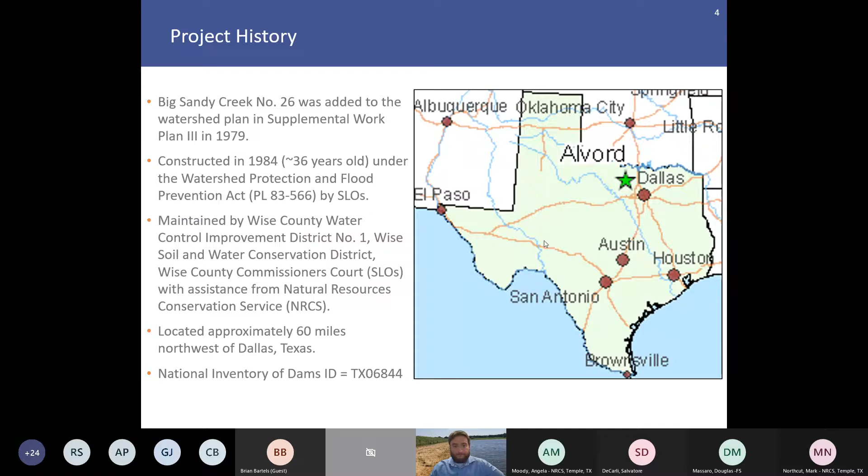Some of the key information regarding the dam: it's about 34 foot tall, has a drainage area around 435 acres, and it's currently classified as high hazard. So this is a case, just like Mark alluded to in the introduction, where the structure was originally designed as a low hazard structure, and due to additional analyses — dam breach, inundation, and hazards downstream — it has since been reclassified as high hazard, and therefore does not meet the requirements for high hazard dams.

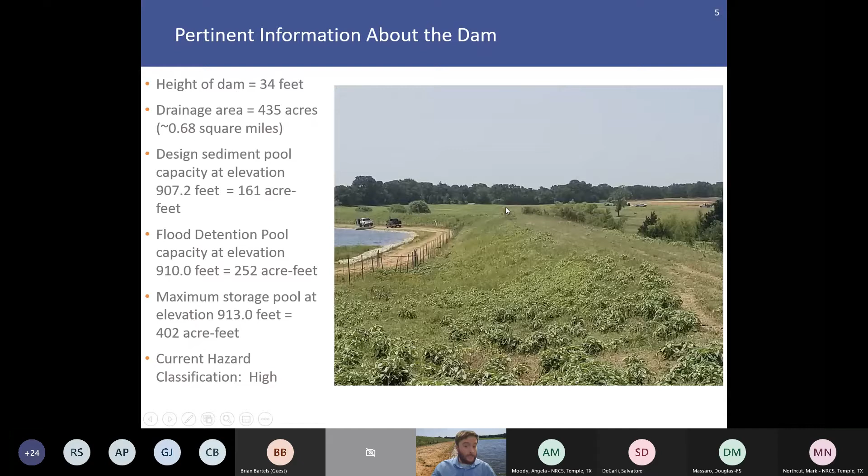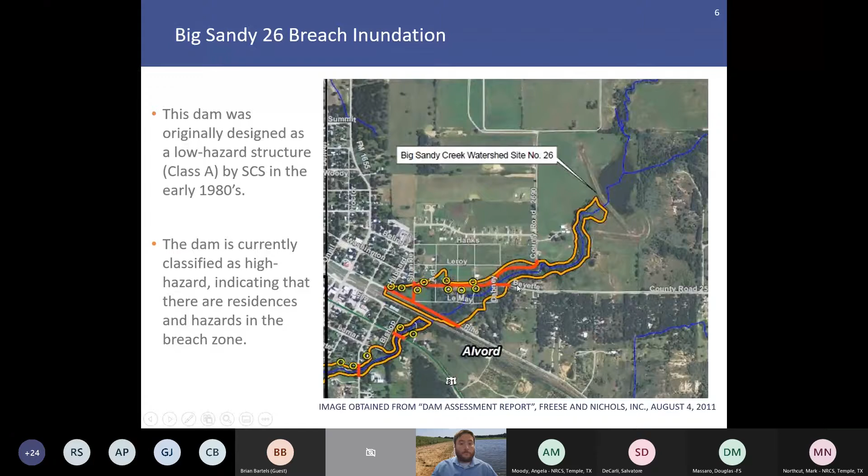This is a look at an excerpt from Freese and Nichols' Dam Breach Inundation Analysis Report, and you can see the limits of the theoretical breach downstream, the structure, and the reservoir up here. These limits represent where the theoretical breach would inundate. Based on the number of hazards and expected loss of life downstream impacted by a potential failure, that's how the high hazard classification is determined.

Looking at a brief timeline: as we mentioned, site number 26 was added to the Supplemental Watershed Plan in the late 1970s, and the dam and spillway were constructed in 1984. Fast forwarding a little bit, Freese and Nichols performed a dam assessment report and dam breach inundation analysis report in 2011, which again confirmed the high hazard classification. At that time, some initial alternatives analyses were performed, and the recommendation for submitting this project into the National Watershed Rehabilitation Program was also made.

And here we are in 2020. The project was accepted as a candidate to be funded partially by the federal government. As part of that, this is where this supplemental watershed planning study commences, and it's one of the prerequisites to acquiring that funding assistance and technical assistance provided by NRCS. As part of that planning study, it brings us to today, which is this meeting where we present the project. It's very much a kickoff in a sense, where we show you what we're planning to do and ask for feedback and, as I said, other known concerns about the project.

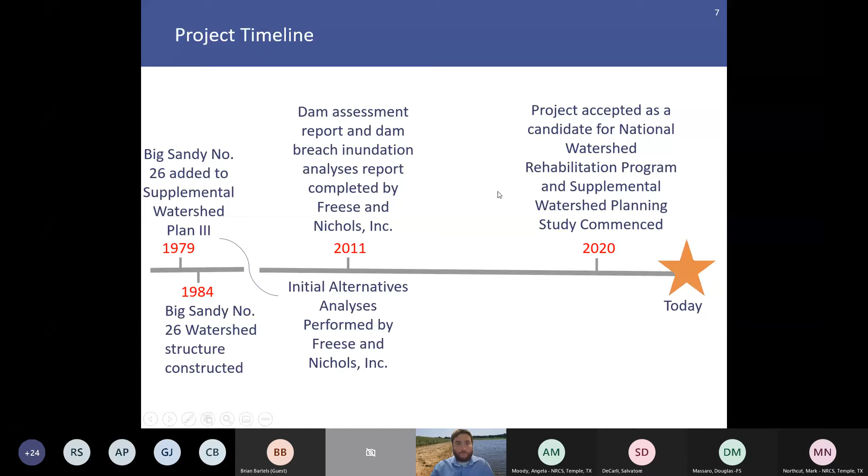So the identified purpose and need of the structure is flood mitigation. Currently, according to the watershed plan, there are no other formal or official purposes of the structure. So it's there for reducing the flooding downstream during storm events.

The existing spillways consist of a reinforced concrete riser structure, with a 24-inch diameter pre-stressed cylinder pipe with anti-seep collars, and a vegetated earthen spillway located in the left abutment. We'll show a little slide here in a moment to talk about some of the nomenclature with dams,

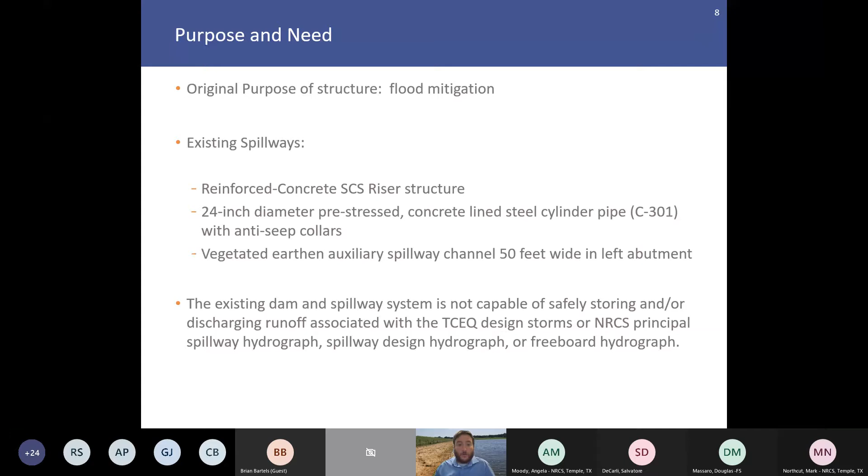just so we're all looking at the same thing. The Freese-Nichols report in 2011 found that the dam and spillway system is not currently capable of safely storing and discharging runoff associated with state-required design storms designated by TCEQ or the NRCS Principal Spillway Hydrograph, Spillway Design Hydrograph, or Freeboard Hydrographs.

This is just a schematic from a FEMA pocket guide showing some of the key features of an earthen dam. So we can see at the top, the principal spillway or riser structure. Here's an emergency spillway. The reservoir or lake is what we have on the upstream side, and on the downstream is the receiving channel, where water moves away from the dam.

This face would be called the downstream slope, and we might have internal drain systems like a toe drain, and energy dissipation structures to prevent scour and erosion at the toe of the dam. Where the dam intersects natural ground, we refer to that as an abutment. And the top of the dam, the flat portion running across, is known as the crest.

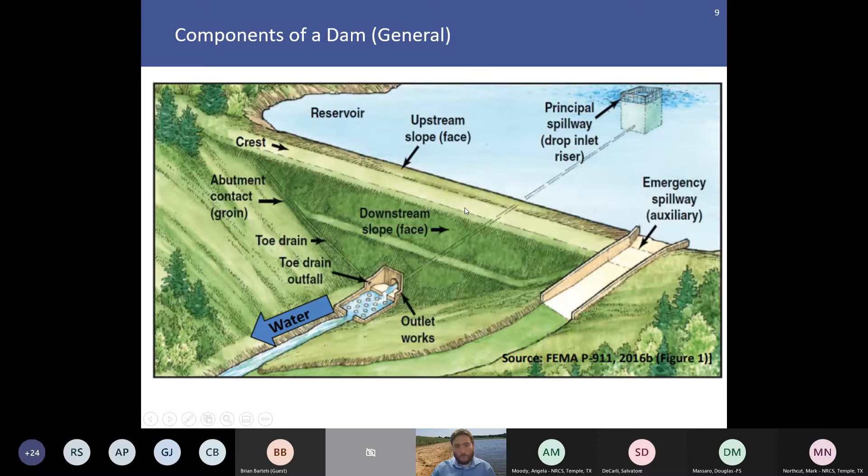When we talk about dams, we usually refer to things as one stands on top of the dam facing downstream. So if we refer to something as left, it would mean as I'm facing downstream to the channel. So this emergency spillway is located in the left abutment of the dam.

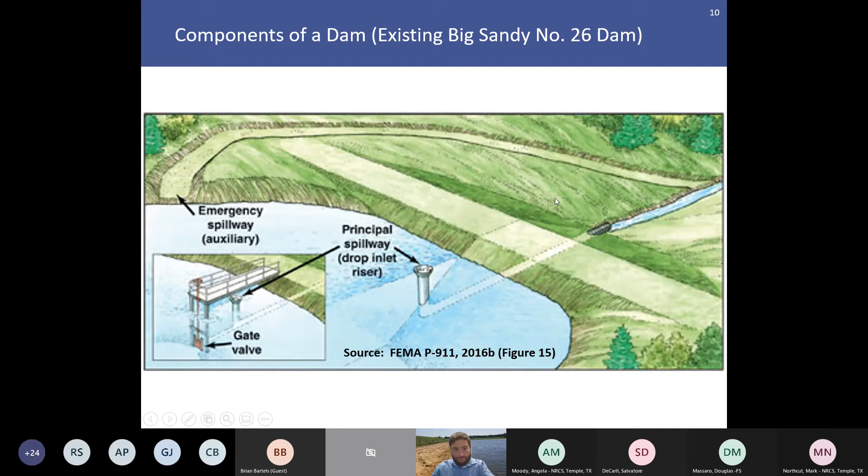And again, we see another schematic of a principal spillway and riser pipe similar to Big Sandy 26. So a few photographs just to contextualize. This is just looking at the upstream slope and the bench access road running along the upstream slope.

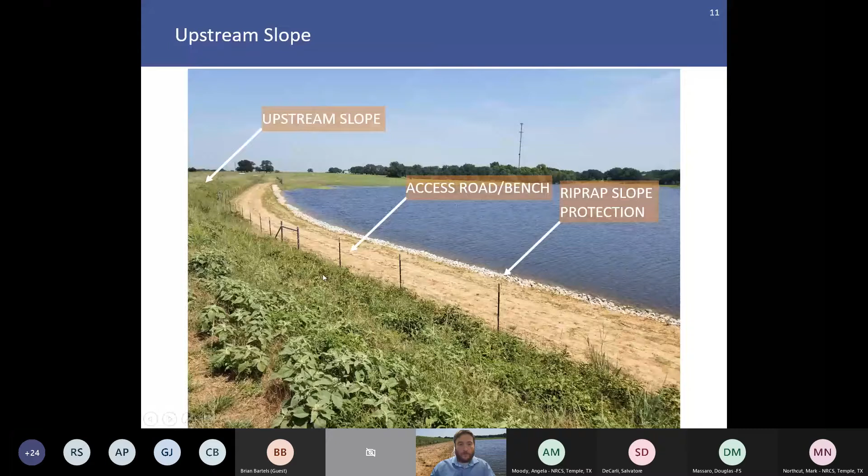There's some riprap wave protection that was recently upgraded, and the upstream slope of the embankment shown here in the reservoir. This is a photograph of the reinforced concrete riser structure. It's a D by 3D riser designed by the SCS or NRCS in the 80s.

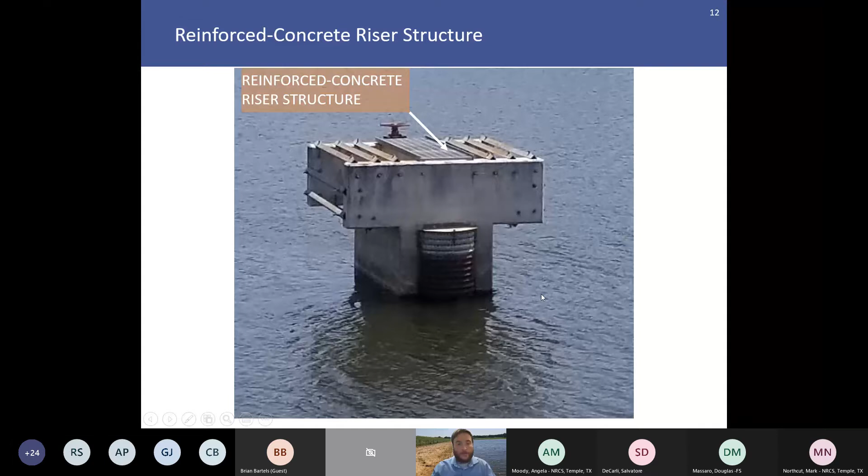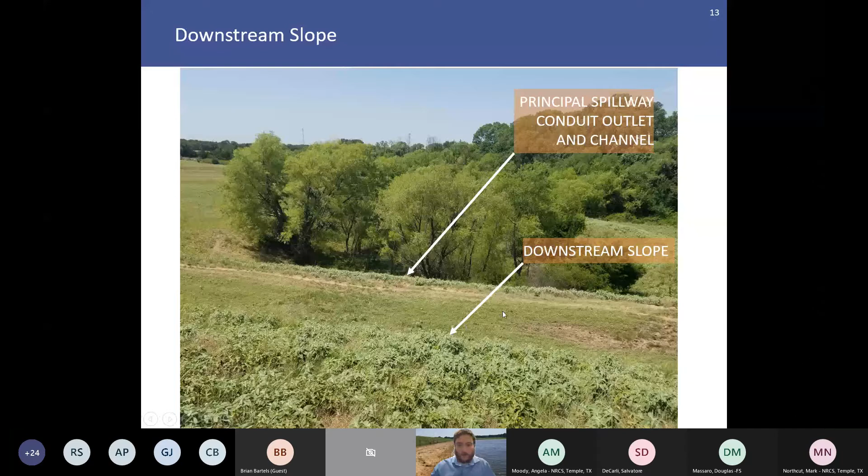This is a look from the crest facing downstream. The area around the trees, down below the trees, is where the principal spillway conduit outlets and discharges into the receiving waters. And right in front of us would be called the downstream slope.

And here's a look off to the left. We'll show a plan view in a moment that will help tie this together a little better, but this is the auxiliary spillway channel located in the left abutment of the dam.

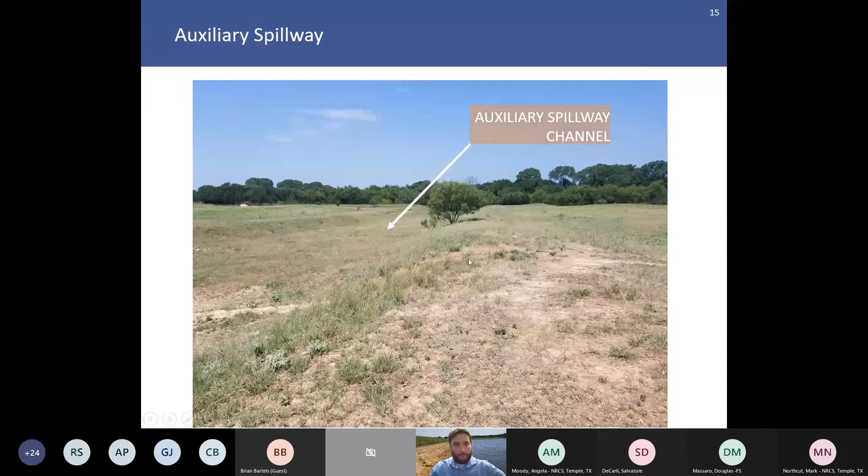So the dam is not exempt from TCEQ rules requirements or federal requirements, and as we mentioned, it does not currently meet the requirements that are designated for high hazard dams. Therefore, a spillway upgrade is required to rehabilitate the subject dam.

I should probably clarify there that there are other ways to achieve compliance with those standards. You could potentially raise the dam or lower the normal pool or things like that. Part of this is we haven't gotten into the alternatives just yet. That's going to be the next step following this meeting once we know what all the concerns are and the limits of study are identified.

But in general, the idea is the dam and spillway don't currently meet the requirements, so we're going to need to either upgrade storage and/or spillway capacity to make that a true statement.

The supplemental watershed planning study is prerequisite to receiving the federal funding for the design and construction of the rehabilitation alternative. The planning study will compare economic advantages and impacts of the different alternatives, identify concerns, resource issues, and also identify ways to reduce impacts to the environment.

So environmental considerations, social considerations, and economic considerations, these are all going to be part of the planning study and what's going to be happening over the next several months as we develop these alternatives.

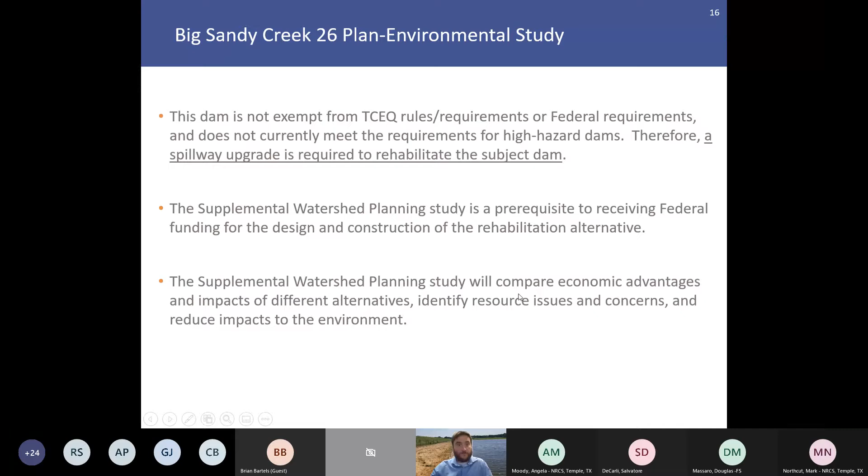The Watershed Rehabilitation Program provides opportunities for cost sharing between the federal government and sponsoring local organizations. The typical cost sharing ratio is about 65% of total design and construction costs paid by the federal government, with the remaining 35% covered by the sponsoring local organizations, not to exceed 100% of total project cost. Items that don't meet the purpose and need, or are considered additional, are also the responsibility of the SLOs.

Part of this planning study is to promote public participation, making sure the public, stakeholders, and regulatory authorities are aware of the project and planning effort. It also requires a series of public meetings, including this one, to identify scoping topics, project opportunities, resource concerns, and other areas of concern the team should consider.

A brief history of the Watershed Program dates back to the 1930s with the Soil Conservation Act. Several public laws have been enacted authorizing the SCS to work on watershed projects, and through additional laws, the authority was extended so the SCS had permanent planning authority and the ability to support sponsoring local organizations with technical and financial assistance.

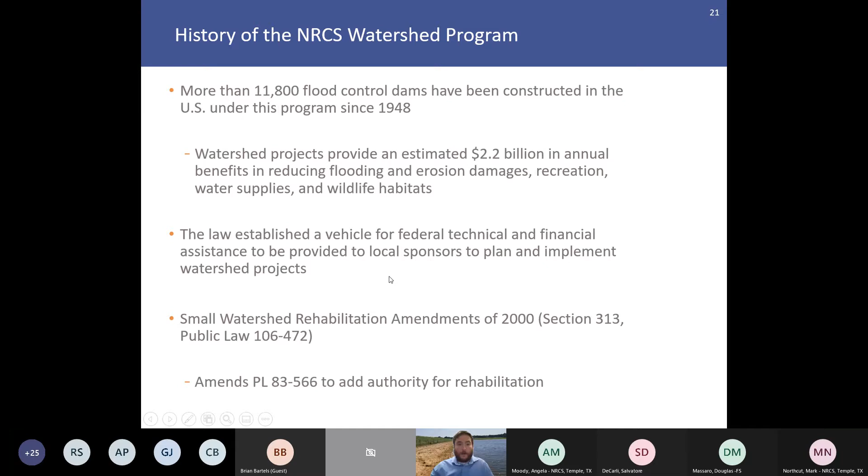Some types of projects eligible for federal assistance involve flood mitigation, watershed protection, water supply, water quality management, agriculture, fish and wildlife, and public recreation, to name a few. And of course, watershed structure rehabilitation, which is the primary focus of this project.

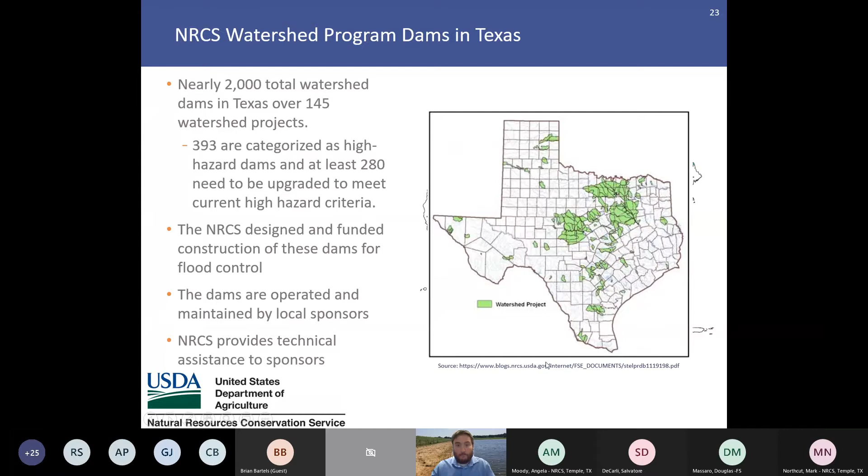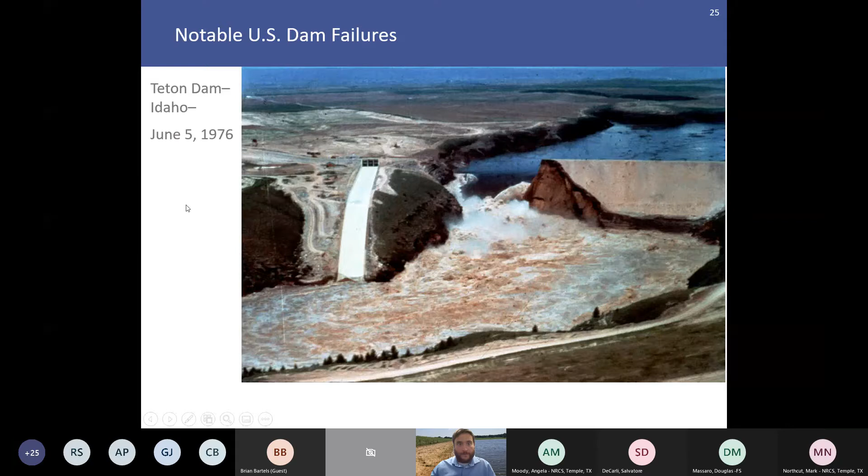Some notable dam failures took place in the 1970s. People may be familiar with Teton Dam, designed by the U.S. Bureau of Reclamation, which unfortunately failed during first filling. Laurel Run Dam in Pennsylvania also failed in the 1970s. These failures occurred before there were many state dam safety regulatory agencies, and these events triggered lawmakers to take a closer look at dams and dam safety.

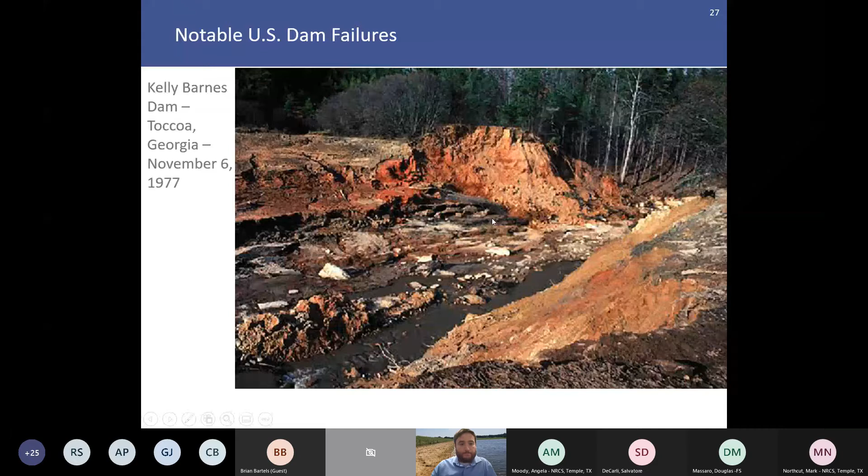Many structures designed and constructed by the NRCS prior to the dam safety era saw a huge amount of dams constructed in that time period. Following the 1970s and the 1977 Kelly Barnes Dam failure in Georgia, regulations changed and the construction of dams has gone down quite a bit. Many fewer dams have been constructed since that time.

Development downstream of the flood control structures built in the 50s and 60s may have caused classifications to change. Things that may have been designed as low hazard now have population at risk in the breach zone, so those folks are at risk, the hazard classification changes, and therefore the requirements for these dams and spillways change.

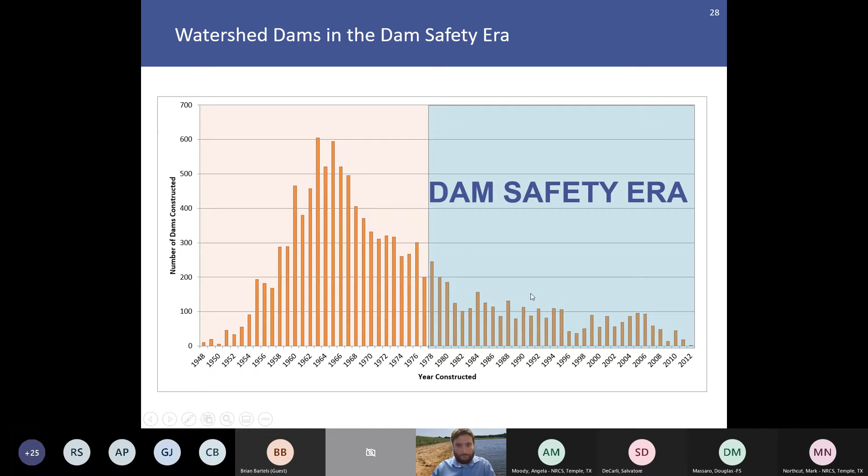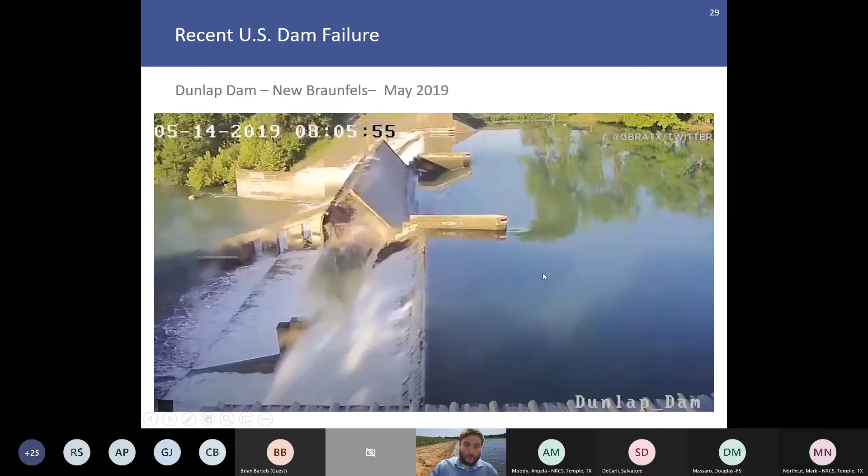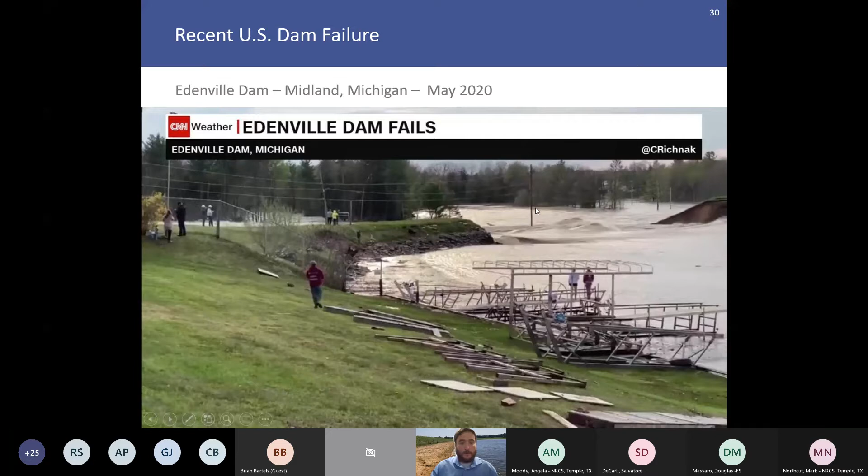Dam failures are not just a thing of the past or a history lesson. The Dunlap Dam in New Braunfels failed about a year and a half ago - people probably saw this gate failure - and also Edenville Dam in Michigan just last year. These are still relevant, and it emphasizes the importance of inspection, dam safety, and making sure structures are compliant with laws and regulations. They're certainly there for a reason.

There are several dam safety agencies and organizations, including USDA, NRCS (who's here today), TCEQ, which is a state regulatory authority on dams, Army Corps, ASDSO, and others.

In Texas, dams are defined as any barrier or barriers and appurtenant structures constructed for the purpose of permanently or temporarily impounding water. State regulations require that all dams 25 feet or more in height with an impoundment of 15 acre-feet or more, or all dams 6 feet or greater in height with an impoundment of 50 acre-feet or more, are considered regulated.

In case anyone's not familiar with the term acre-foot, it can be thought of as 1 acre of area with 1 foot depth of water over it, which is pretty close to the size of a football field. So if you picture a football field with a 1 foot swimming pool over it, that would be about 1 acre-foot.

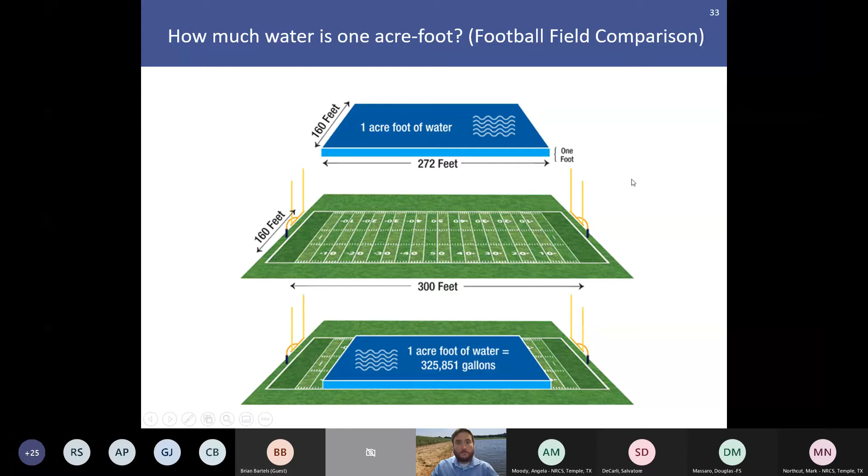So there are 3 different hazard classifications in Texas, and also through the NRCS, that range from low hazard to high hazard, and these are determined based on the breach inundation results and the amount of damage or loss of life that's anticipated in the event of a catastrophic failure of the structure.

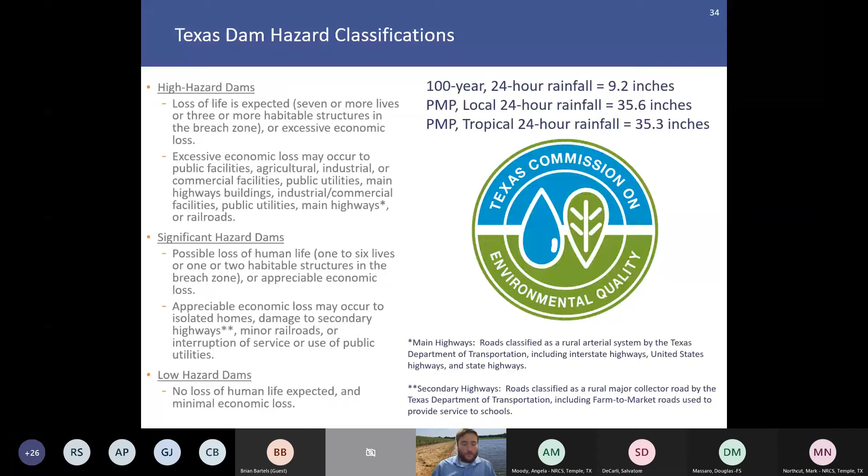The design storms required for high hazard dams across the country, and in Texas, are typically fractions of the probable maximum precipitation, or PMP. To give a sense of what that means, this graph shows a comparison between a 100-year storm event, 24-hour duration, and a probable maximum precipitation storm event, 24-hour duration. You can see you have almost 10 inches in the 100-year event, but almost 36 inches of rainfall in a 24-hour period as the PMP. So this is a very intense storm.

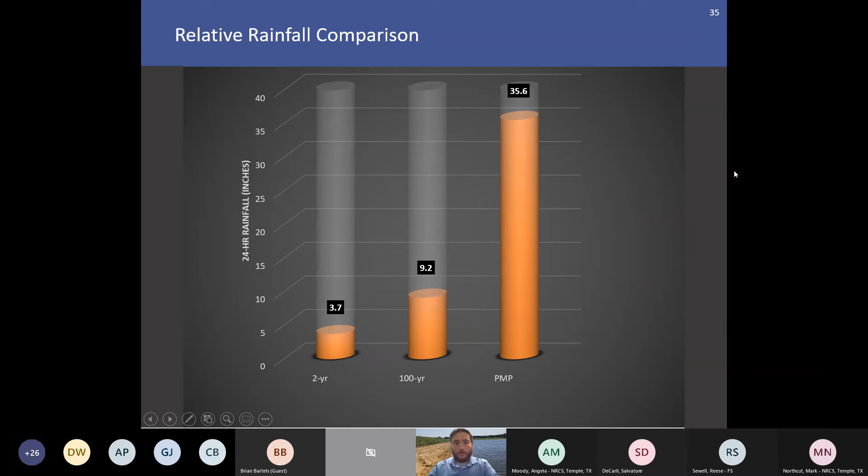It's not to say that these don't happen. Fractions of the PMP happen. Real storm events happen that mimic this amount of rainfall over this duration, and so there is a high standard for high hazard dams. This is again to protect the public downstream and to promote public safety.

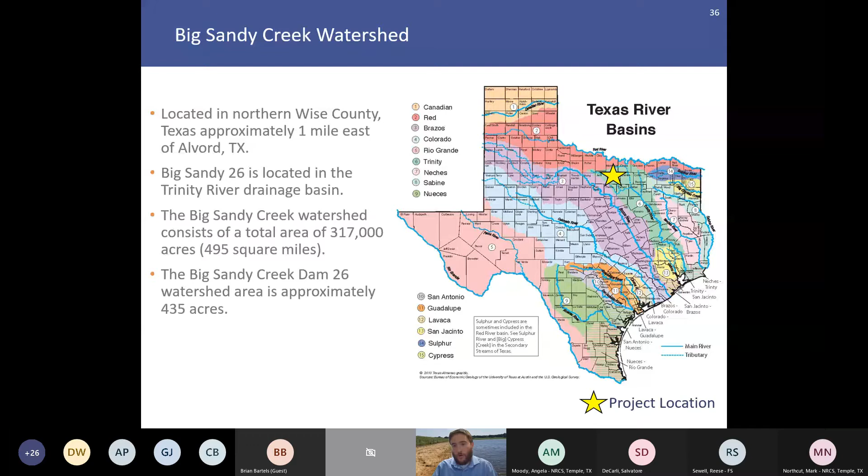So this is a map of the state, showing some of the different watersheds throughout the state. The Big Sandy Creek watershed is part of the Trinity River drainage basin, and the entire Big Sandy Creek watershed consists of about almost 500 square miles. If we zoom in a little closer, we can see the approximate location - we're in the upper reaches of the Trinity River drainage basin.

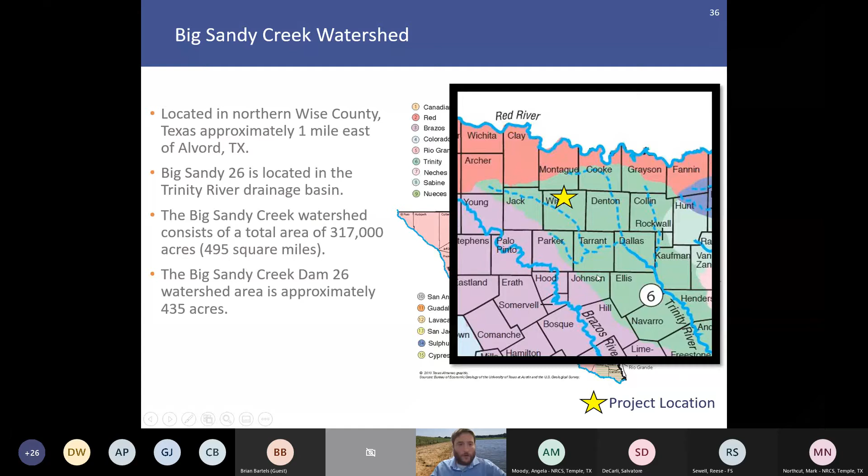So, getting back to the supplemental watershed plan and what we're going to do in the future here - the main focal points of the analysis and study include reviewing the hydraulic capacity of the existing spillway and outlet works, reviewing performance during design storm events, and this includes review of the integrity analysis of the earthen auxiliary spillway. We're going to review downstream areas and flooding in the breach inundation zone.

Upstream areas, if there's any flooding or available additional storage capacity that can be leveraged, the economic and social benefits of the project, some temporary impacts during construction, including erosion and sedimentation control issues, traffic control and detours, or temporary environmental and/or social impacts caused by increased truck traffic or other items like that.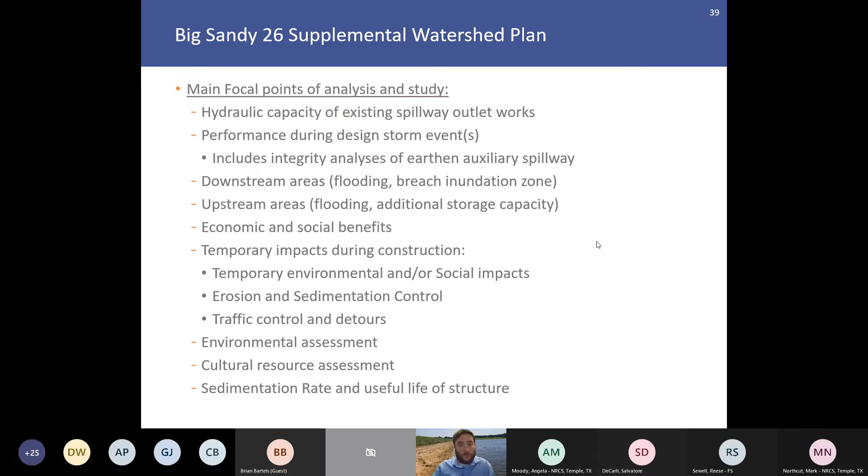So now, project timeline looking forward - here we are today in this meeting, and following this, the project team is going to identify resource and scoping concerns, evaluate the existing structure. We're going to identify and refine alternatives that will, when fully designed and constructed by a qualified contractor, bring the dam and spillway into compliance with applicable state and federal regulations for high hazard dams.

We're going to begin drafting the supplemental watershed Plan EA document. That document will be available for public and interagency review once it's drafted, so there will be more opportunities for folks here and others to provide comment and feedback to the team. And then we will hold a second public meeting, likely midsummer, to present the preferred alternatives and solicit feedback once more.

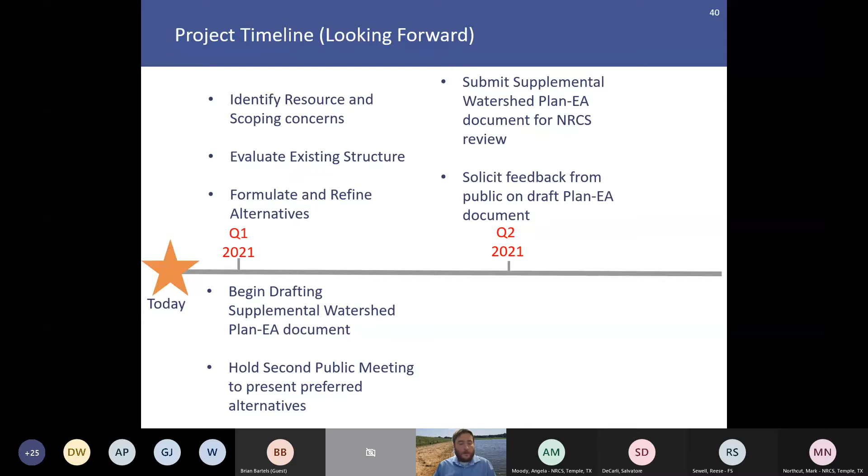By mid to late 2021, we will be submitting the entire supplemental watershed plan to NRCS for review, and we will be soliciting feedback on the overall Plan EA document. By Q3, we plan on finalizing the document and identifying the preferred, or selected, alternative. At that point, if everybody's still moving forward, we would begin the final design of the rehabilitation.

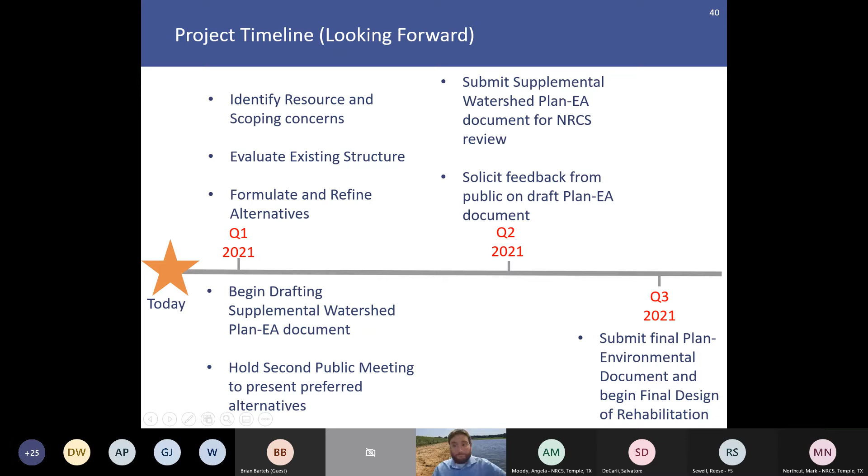So some of the major milestones: late in the fall, early in the fall, Schnabel and the board, the state board, and NRCS met to have a kickoff and initiate the study. Today, we're holding the first public meeting - thank you all for attending again.

In March, we're going to be presenting alternatives to the sponsors, and they will decide a preferred alternative. Then in the summer, we will begin incorporating comments from the National Watershed Management Review Team in NRCS, and later that summer, submit the plan to the national headquarters and finalize the plan so that we can prepare for final design.

So the title of this meeting or presentation is a scoping meeting, and we're defining scope as the range of actions, alternatives, and impacts that are to be considered in the environmental assessment document. Scoping is used to identify the significant issues that need to be reviewed for detailed analysis, and also to eliminate issues that are deemed to be not significant.

For instance, coral reefs probably will not be a major concern on this project, although it is identified as a typical scoping concern.

So we're soliciting federal, state, and local agencies, as well as public interest groups, property owners, and other stakeholders as well.